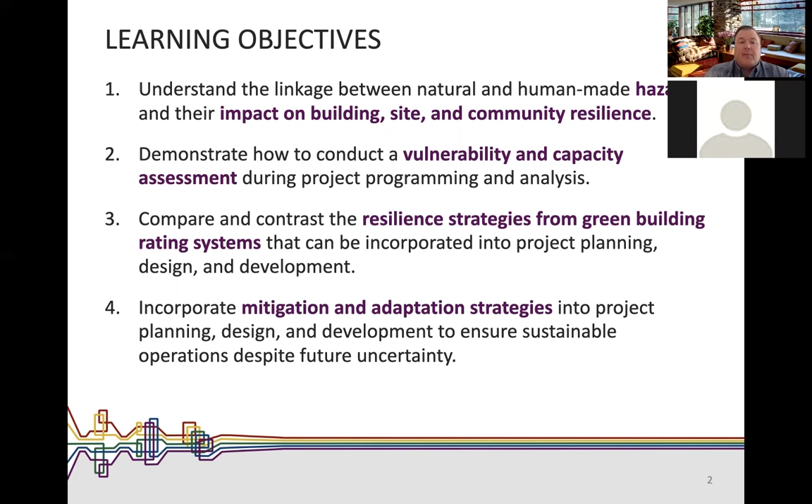Our learning objectives today are to understand the linkage between natural and man-made hazards and their impact on building, site, and community resilience, and to demonstrate how to conduct a vulnerability and capacity assessment during project planning, programming, and analysis. We'll also compare and contrast resilience strategies from green building rating systems that can be incorporated into project planning, design, and development, and how to incorporate mitigation and adaptation strategies to ensure sustainable operations despite future uncertainty.

So what is resilience? Resilience is the capacity of a system, be it an individual, a forest, a city, or a building, to deal with change and to continue on with the operations of life.

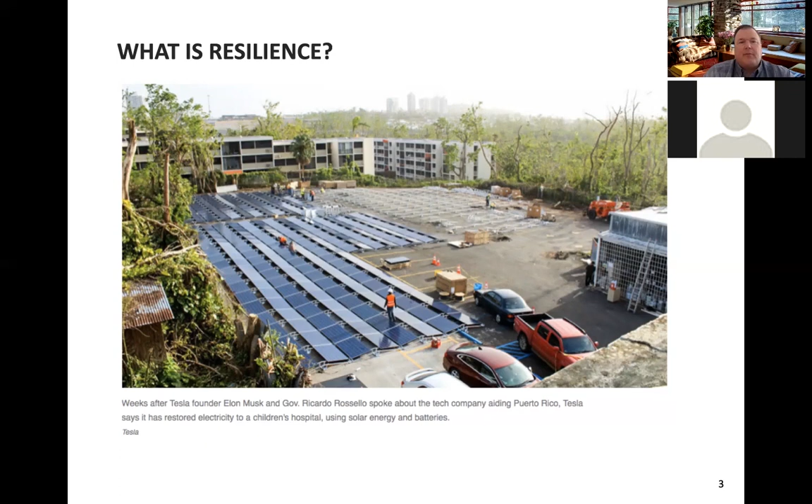As we've seen over the last few years, these disruptions can take many forms: from hurricanes in Puerto Rico that knocked out power to a hospital that was restored by Tesla installing solar panels and solar batteries months before the electrical grid was back up and running, to disruptions like buildings being burned during the civil unrest of the past few months, where business owners need to figure out how to rebuild and restore operations, and homes destroyed where people need to find new homes.

To the changes we're seeing from the global pandemic that's changing our work lives, having many of us work from home, changing the way we use offices, and many other things, to things like the fires we see in the West that have burned whole towns and destroyed people's homes.

These disruptions can take many forms, and we need to figure out how to incorporate them into the built environment, integrating them with our green building systems rather than having a whole separate set of resilience guidelines, because we need both resilience and sustainability to have the built environment we need in the future.

So a few definitions to keep in mind: resilience is this capacity to deal with change and to continue to develop.

These changes or disruptions expose vulnerabilities in our systems that we need to think through and plan for, theorizing with our project teams what kinds of disruptions might happen, so that we can design into our systems the ability to address these things.

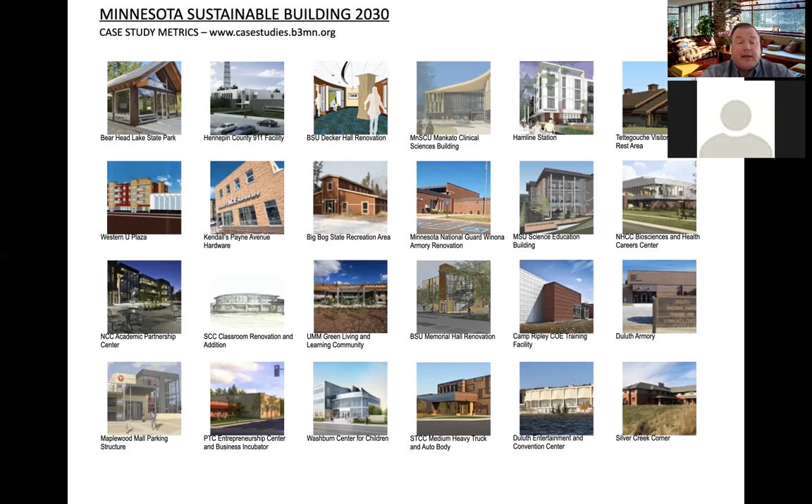So to do this, the approach we took in some of our early research, sponsored by MPCA, was the forerunner to the work we've done that we're now integrating into B3.

It's very difficult to think about: is it a hurricane? Is it a thunderstorm? Is it a tornado? There are hundreds and hundreds of potential event types that could disrupt the built environment.

The approach we took was, based upon other work we've done at the center, to think of the built environment and how it can become a regenerative system versus our existing approach to systems in the built environment. The existing approach is really focused on efficiency, thinking of the sources of materials, energy, water, etc. as sort of one-way throughputs through the building.

Instead, if we start to think of the built environment as a regenerative system, mimicking natural systems, we would think of the built environment as a circular system, where things are used and reused, and we have multiple sources of supply of the things we need - energy, water, etc.

Because we have multiple sources of supply, and we're trying to generate energy from the sun or do rainwater capture, things like that, we need to be able to store resources so that when we collect them, we can store them and then release them over time as the users of a building are using them.

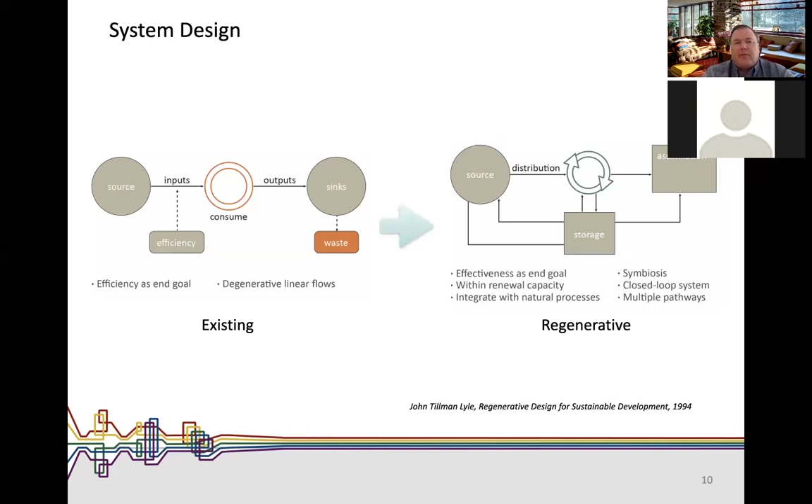We based some of this work on work that the federal government had done. The Department of Energy and Department of Defense had done a series of assessments of disruptions at military bases, disconnecting them from power, disconnecting them from water, adding different weather events that would occur. They gamed them out, made changes to the base, and tested them again.

We took a very similar approach, taking two building types. Instead of testing with different naturally occurring and man-made events, we took a high-performing building and tested it with three disruptions: disconnected it from the power grid for 10 days, disconnected it from water supply and wastewater removal, and vehicle transport as the third piece, all for 10 days. We tested those buildings, then redesigned them as regenerative systems, tested them again, and saw how they performed to come up with our research.

We also did our modeling using future weather files from the IPCC 5th assessment, so that we were thinking about how to incorporate future weather conditions into our buildings here in Minnesota as we go.

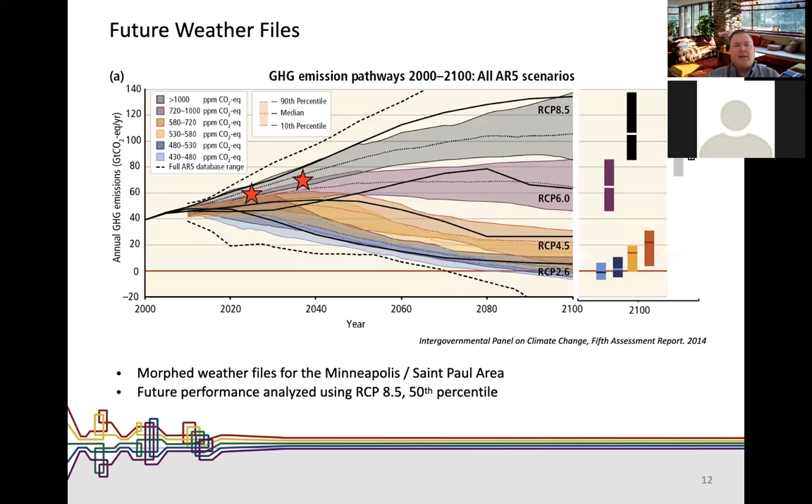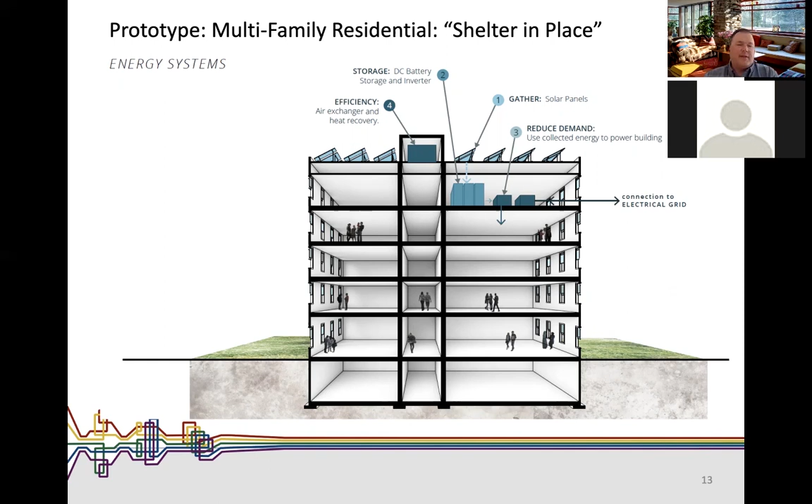We looked at two building types for this early research. A multifamily residential building came to be known as a shelter-in-place scenario for us, because it's a building that would be hit by one of these disruptions, and the occupants would try to stay in the building and shelter in place until those systems were restored.

The other building type we looked at, what we started to think of as the resilience hub, would be a building like a public library, a community school, or a community center, where it would be hit with the disruption, and there might be other buildings in the community that were damaged or destroyed. People needed to leave them, board them up and leave, and have a place to stay, a place to charge their phones, a safe place until people could get to them to support them and the systems were back up.

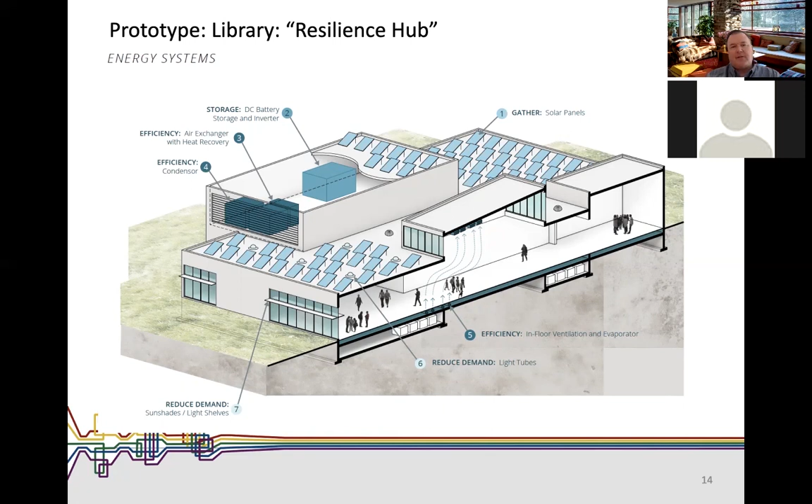This resilience hub idea started to become a good idea because these building types—community centers, schools, and libraries—if you take the Twin Cities, most of the population lives within one mile of one, if not multiple, of these buildings. If we started to set them up as resilience hubs, it would give us another source, another place we could go if something happened to disrupt our community.

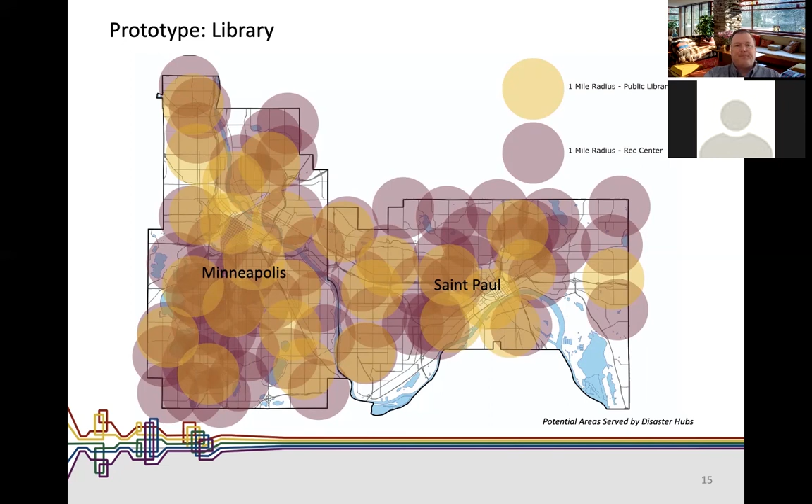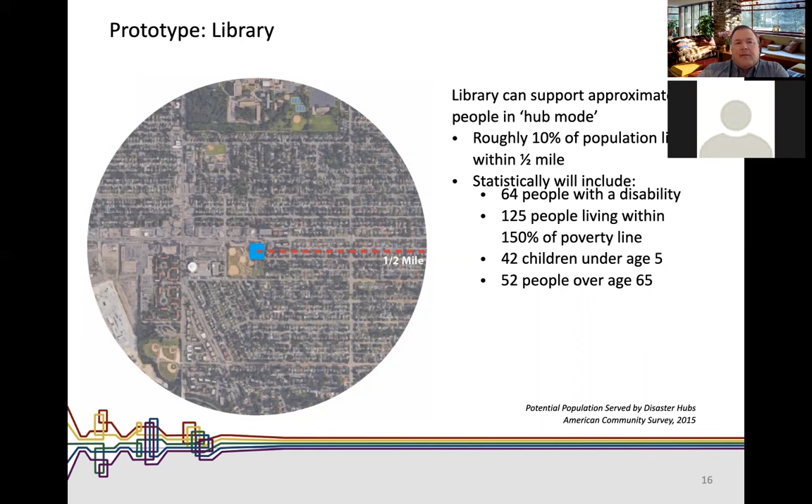The important thing to keep in mind with these resilience hubs is that where they might be designed with one occupancy for daily operations—maybe it's a library designed for 50 people—now in an event scenario, the occupancy would go up. Instead of 50 people, it might be collecting 500 people from the neighborhood who are sheltering there, sleeping there, charging phones, being fed there, until the event is through.

So we tested these two different building types, again using future weather files. And when you start to look at future weather files, a couple of things start to emerge. Strategies that we wouldn't have prioritized when looking at weather history now start to become more important as we see our weather heating up and becoming more humid.

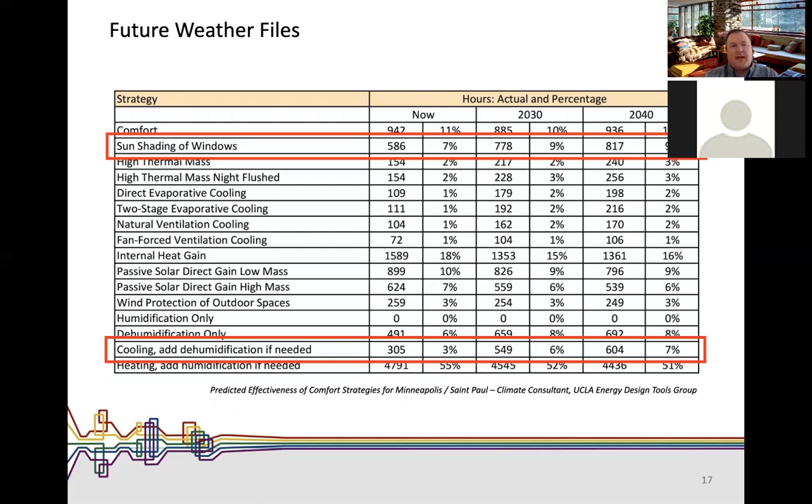Strategies like sun shading of windows, which wouldn't really have been cost-effective in the past, might start to become cost-effective in the future. Cooling and dehumidification needs increase, almost doubling in terms of the hours needed to provide comfort in the building, so that becomes a more important strategy.

In addition, we see that the energy usage, whether you look at the old code building or the new code building, the overall energy usage doesn't change much, because as heating goes down, cooling loads go up. So that isn't significantly different.

What's really interesting is the importance of, in our optimized buildings, design teams are creating high performance envelopes with high R-value walls and high performing window systems before going on to do renewable energy or other things. And what we see in buildings like this reinforces the importance of investing in really good envelopes. That very good envelope, originally created for energy efficiency reasons, also resists and isolates the internal environment from a lot of these weather changes we see in the future, especially very high temperatures and very high humidity in the future weather files here in Minnesota.

If you create these high performing envelopes, it has the side benefit of energy efficiency for sustainability, but it also gives you an envelope that can hold its temperature for long periods without the use of the mechanical system. So you can keep occupants cool during hot times and take minimal amounts of energy to maintain safe ventilation and temperatures over a 10-day disruption. And the same is true in both building types.

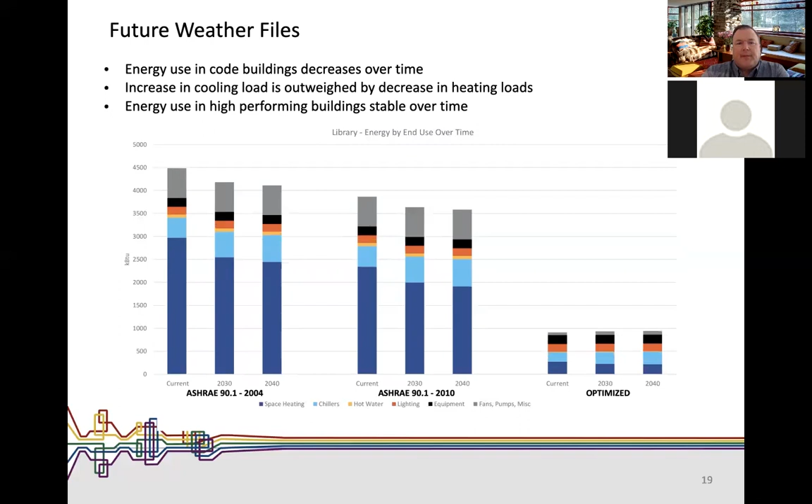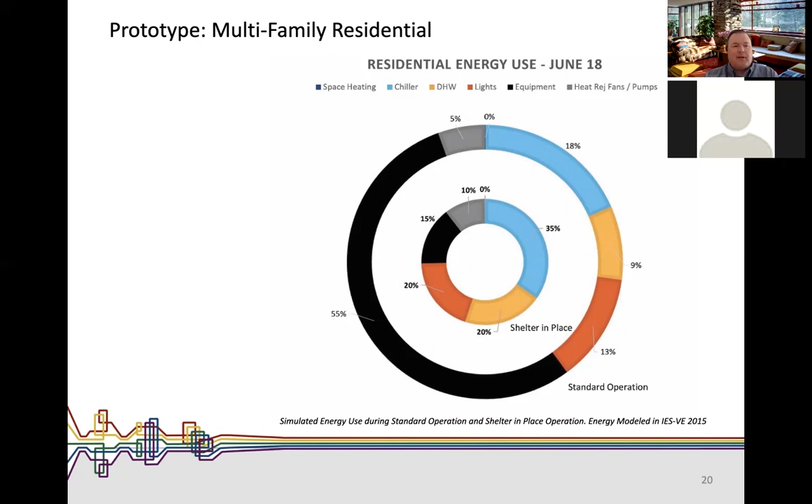So people can live over time. It's interesting because a five-story multifamily building, in typical sustainable goal setting, you'd say it's impossible for this to be a net zero building generating all the energy it needs in standard operations. But in shelter-in-place mode, there's more than enough roof area to put solar panels on the roof, couple it with batteries, and continually provide enough energy to charge the batteries.

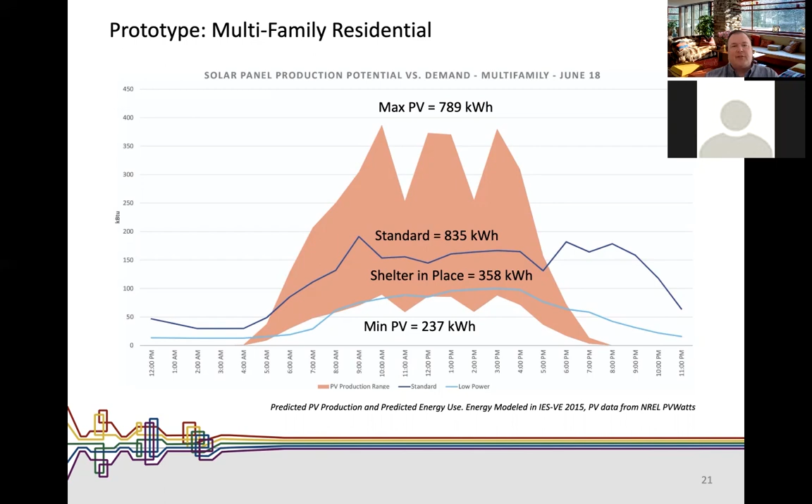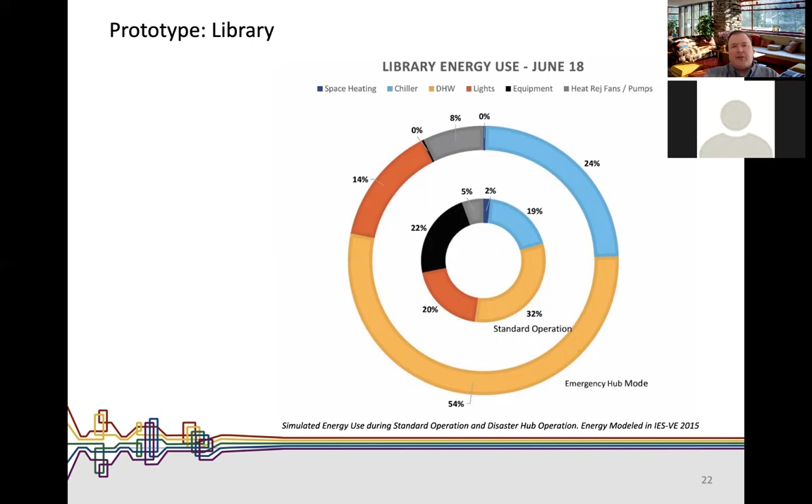So you could go on for more than a 10-day disruption of the grid in shelter-in-place mode if needed. And the library is going in the opposite direction because it's a resilience hub—low amount of energy usage in its regular operation, but increasing its occupancy by almost tenfold, so larger amounts of energy usage during the resilience hub mode.

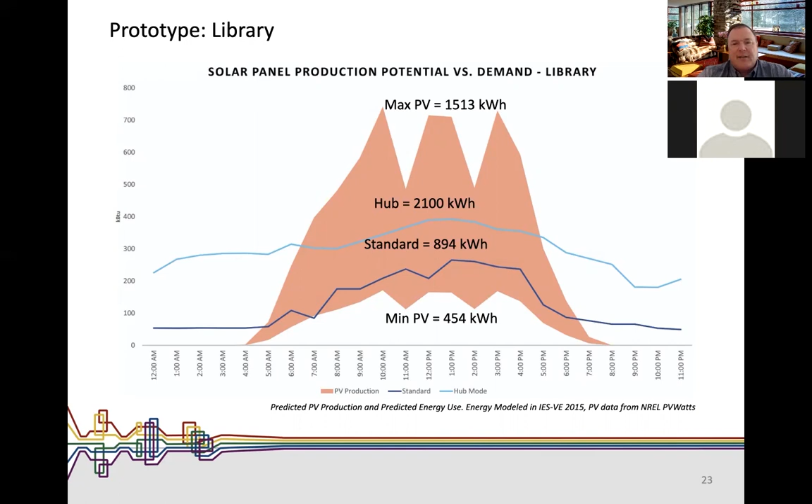Now we have a building that if designed to be net zero energy, just thinking of an entire year, we wouldn't put as much solar on the roof as when we think of the scenario that it might be a resilience hub with more energy usage. So we might put more solar panels on to take care of this larger energy usage if there was some kind of disruption. It's a good example of why you need multiple lenses to think about what your building is, what its program is, and how to design its systems in multiple ways to address these kinds of shocks.

The other thing we found in the research is the importance of shifting from regenerative goals. One of the goals in this early research was having buildings mimic living systems—goals like having multiple sources of supply of energy, a circular closed-loop water system, et cetera.

But we also need to think of how to add resilience goals to that. Resilience goals would add things like: we want an islandable energy system so we can have continuity of power with whatever might happen. We redesign the water system so we can have continuity of water and sanitation systems over time. It's important to do this multiple-lens goal setting—sustainability goals, resilience goals—and translate those into macro-level strategies, like having a higher performing envelope, that help maintain habitable temperatures.

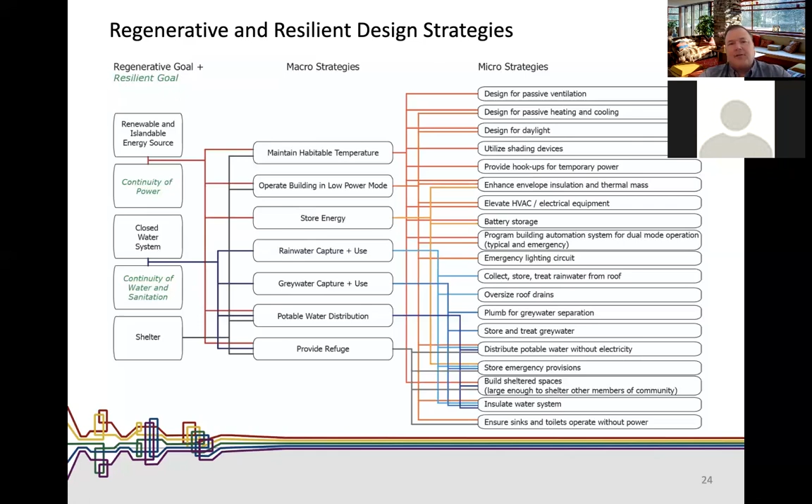And so with that, I'll hand it off to Liz, who will give you more specifics about how we're integrating this research into the B3 guidelines.

Thanks, Richard. As mentioned, I'll be covering our B3 approach to resilience, which has been in development for the past year or so, and will be introduced for projects beginning pre-design next year.

The biggest change will be a new guideline in the performance management section. The intent of the new guideline is to bring awareness and intention to the functionality and role of the project in the event of a disruption of energy, water, communication, or other services.

The guideline will require an assessment using our newly developed tool, the B3 Resilience tool, and implementation of at least one design strategy as a response to that assessment.

The B3 Resilience tool is an Excel-based worksheet. It includes some preloaded data from the Minnesota State Hazard Mitigation Plan, which was updated and released in 2019. This plan is developed by the Department of Public Safety's Homeland Security and Emergency Management Division and is approved by FEMA.

It includes a county-level survey of the history and possible future of natural hazards across the state. Because the Minnesota Hazard Mitigation Plan is the backbone of the worksheet, the assessment begins with a county-level natural hazard assessment, proceeds to an assessment of human-made hazards, and then an assessment of the capacity and goals of the project, and finally a process of identifying resilient design strategies that respond to the hazards and goals identified.

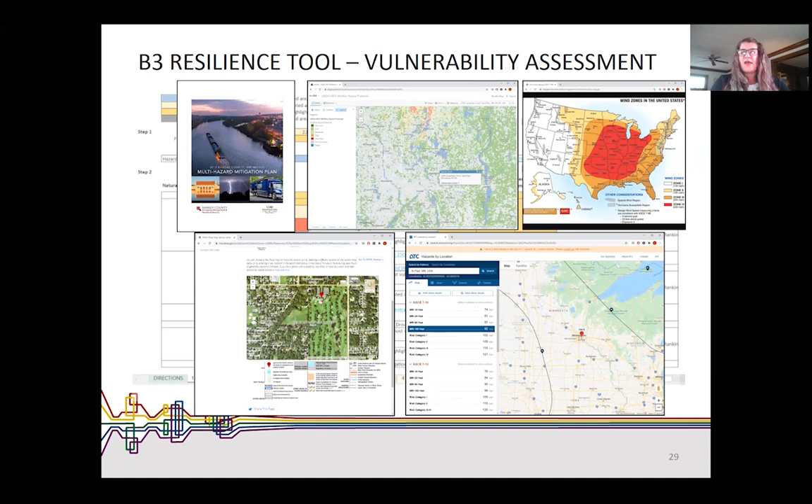After compiling the information about the listed natural hazards, project teams are asked to discuss and determine the risk level to their specific project site and program, and which building systems may be impacted by a significant natural hazard event. Impacted services in the tool include electricity, natural gas, potable water, wastewater or sewage, transportation to or from the project, the physical structure, the safety of occupants, communication, and food access to and from the project.

In this example project, there's a medium wind risk for the site, and because this area is served by overhead power lines, electricity is a vulnerable system due to wind risk. Because this is a fairly dense site, there's also a danger of hazards flying through the air associated with wind or tornado risk. So this process is the distillation of the county level data down to the project site level and even the system level.

So this is meant to be a discussion and based process of translating high level data down to building level impacts.

Continuing on that same vein, we're looking here at the human-made hazards included in the tool. It's also vitally important to consider these, but there is a lack of data or underpinning to base probability on.

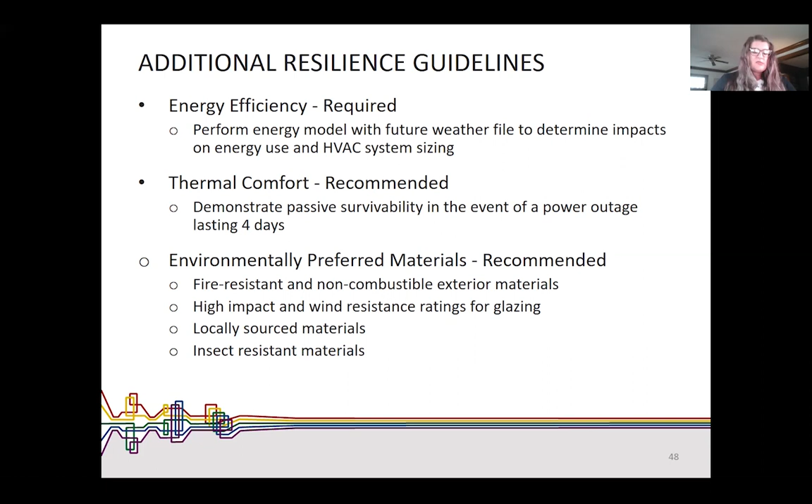The recommended guidelines include demonstrating passive survivability with no electricity, which entails maintaining safe interior temperatures for a period of 4 days during representative peak time, related to the super insulated envelope requirements mentioned earlier. There may also be material considerations for durability to hazards, including fire or wind impacts, using materials that can be repaired or replaced with local labor and stock, and considering expanded insect ranges, especially termites.

Because sustainable design and resilient design are closely linked, several guidelines already in the B3 program contribute to the overall resilience of buildings and sites. In the site and water guidelines, there are requirements around floodplain restrictions, stormwater management, soil stabilization, and resilient vegetation that all contribute to resilience. Renewable energy, efficiency, and efficient plug loads contribute to lower energy requirements for buildings at all times, and in critical load situations lower the required generation and storage needed for resilient power systems.

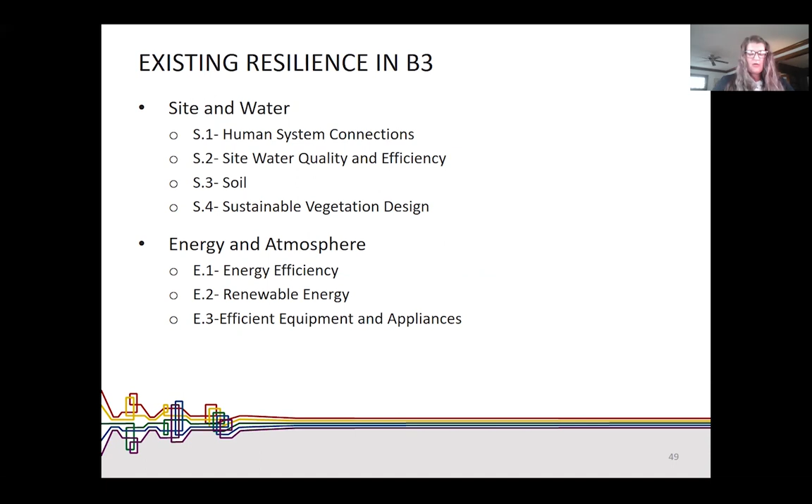Additionally, guidelines to ensure moisture-safe construction and thermal comfort enhance the durability of the envelope and further contribute to passive survivability. Use of low power lighting and daylighting further reduces critical loads during emergency operation. Comprehensive wayfinding can ensure people can move easily through the project and that anyone sheltering in the building can navigate and access it, contributing to community resilience and supporting sheltering and resilience hub goals.

Finally, the materials and waste guidelines require use of durable materials, consideration of design for deconstruction in the event of a building damaged beyond use but with salvageable materials, and a reduction of hazardous materials in the project which may affect humans during extended occupancy or which may become hazardous when burned.

This is a very quick overview of our peer programs' approach to resilience and how our B3 process can fit within those programs to contribute to these optional points. We've already referenced the LEED pilot credits, one for assessment and planning for resilience and one for design for enhanced resilience, both of which would contribute to the optional innovation credit in the LEED system.

Enterprise Green Communities awards optional points for a vulnerability assessment, for strengthening cultural resilience, for providing potable water during emergencies, and for resilient energy systems in the form of floodproofing and providing electricity for those critical loads.

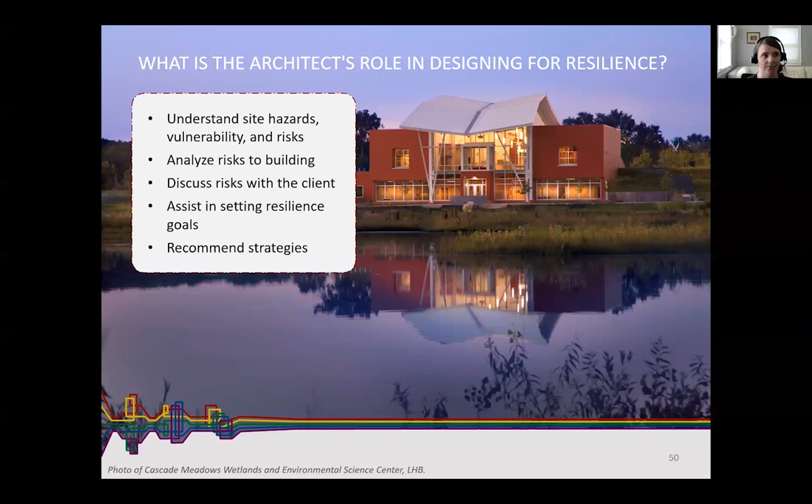So what should you keep in mind when conducting a vulnerability assessment? First, ideally, this would be done prior to site selection and programming to help inform these activities. Avoiding floodplains is one obvious example of this, as shown here, and is something that is required by B3 elsewhere in the guidelines.

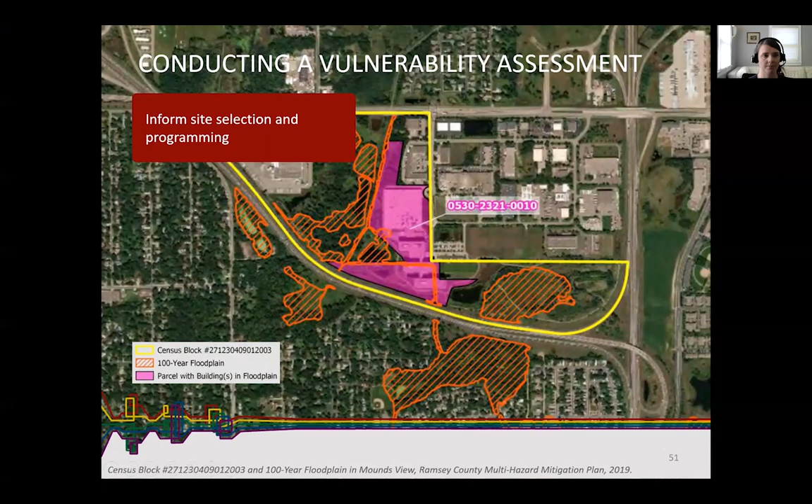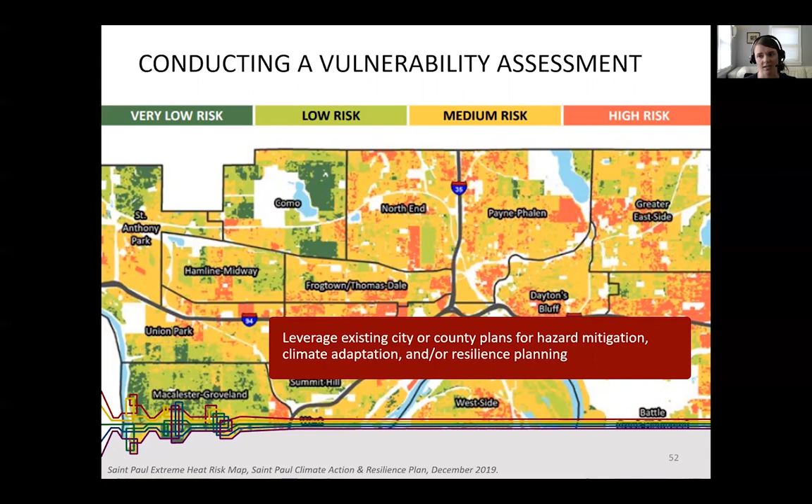You may be able to find documentation that's already been created that compiles information for your project site, whether it's a hazard mitigation, climate adaptation, or resilience plan. As Liz demonstrated, the B3 tool links to county-level hazard mitigation plans. For a little bit finer resolution of detail, this extreme heat risk map is from St. Paul's Climate Action and Resilience Plan, which also includes other risks and resilience strategies. But also remember that site-specific conditions may alter the risks identified in larger scale community plans.

Be sure to note the age and the source of the data that you're referencing. In some cases, the relationship between older data and what's happening today is relatively obvious. For example, in cities or neighborhoods that don't have a lot of turnover, large percentages of children under 5 years old will turn into large percentages of children 5 to 10 years old 5 years later. But in other instances, trends over time are a little bit less predictable.

This example is showing days with maximum temperatures above 95 degrees, both historically and projected into the future. We know that extreme heat and precipitation events have increased and are anticipated to continue increasing, so many areas that may not currently require air conditioning or flood protection are more likely to need these strategies during the lifetime of the building.

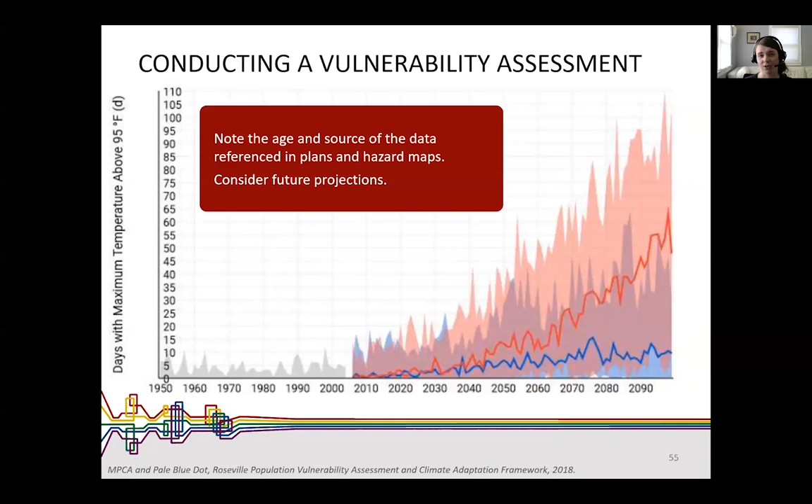Just a note on this graph here: the red scenario assumes a business-as-usual increase in greenhouse gas emissions, while the blue scenario assumes that global emissions stabilize. In the description of the graph, it notes that people who have a low tolerance for risk often focus on the red scenario. So that's something you're thinking about when you're setting your resilience goals for the project - what is the risk tolerance of the owner and of the building users?

Once you have a handle on the different hazards, like extreme heat, you'll need to evaluate the relative risks of these hazards leading to harm. As Liz showed with the B3 tool, the county level plan identifies hazards and the likelihood of each hazard occurring. Then the project team would evaluate the potential impacts of the hazard to the building and to its users before determining the relative risk. One simplified way of doing this is to weigh the likelihood of the hazard versus the impact of that hazard occurring on the building occupants and the building itself.

So bringing back in Richard's example of the recent civil unrest, this is something that may have had a low impact on some buildings - graffiti, or maybe a change in operating hours - a bigger impact on those that had broken windows or looting, and then a larger still impact on those that ended up burned to the ground.

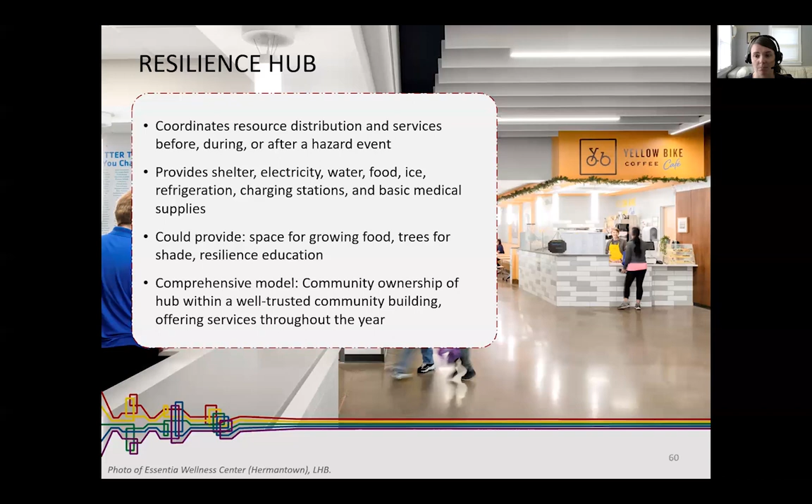The Urban Sustainability Directors Network describes the ideal resilience hub as an enhanced community center with established community ownership and trust. These centers would contribute to building social resilience year-round by offering additional services such as translation, flu shots, diabetes screening, job training, or after-school programs. But that type of thing may not be appropriate for every single project you're working on.

We wanted to discuss the synergies and conflicts between resilience and sustainability. Liz already walked through how measures throughout the B3 guidelines contribute to both sustainability and resilience, whether through site selection, connections to trails and transit, stormwater management, biodiverse plantings, water and energy efficiency, passive thermal and lighting strategies, and renewable energy—which requires the additional ability to operate independently from the grid to move from a sustainability strategy to a resilience strategy.

I also wanted to point out the importance of wayfinding and universal access, both for protecting occupants during extreme conditions that may impact visibility or mental cognition, but also for projects intending to open up to the broader community as a resilience hub, where users may be much more diverse than those who use the building on a daily basis.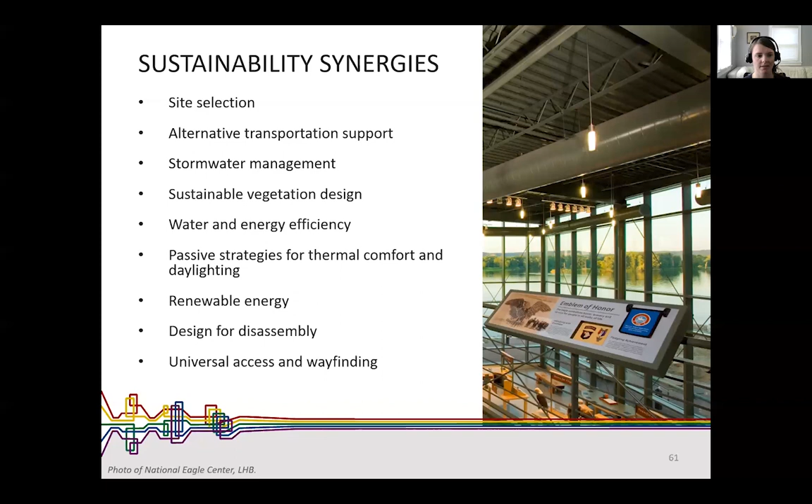There are, of course, also some potential conflicts between sustainability and resilience, mostly focused on the theme of using additional resources to oversize spaces or systems to handle extreme scenarios. In Richard's example of oversizing the library's PV system to accommodate resilience hub loads, this is relatively easily addressed by sending the excess clean power back to the grid.

In other cases, you might decide it doesn't make sense to design a cooling system to handle a rare 110-degree day, and that other strategies like personal thermal comfort systems may make more sense to tackle these extreme conditions. In other cases, you may just be trying to choose a more sustainable resilient solution, such as ensuring an oversized structure uses low carbon materials, or offsetting the extra electricity from air conditioning with on-site solar.

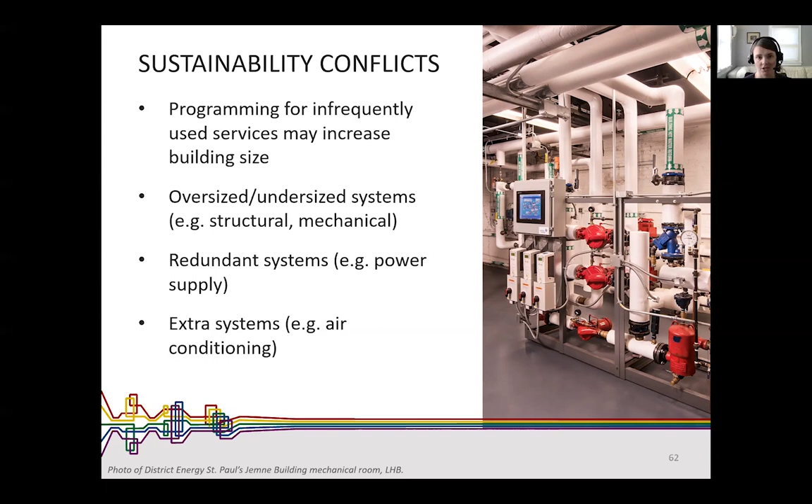We wanted to leave you with a few key takeaways before opening it up for questions. First, embrace resilience as a value add to your client. Some are already requiring resilience to be considered, and many others are newly realizing its value. So celebrate this as another service we can provide, and engage staff who are especially interested in this topic to become experts at it.

Next, if no one else is, raise the topic—whether you're an emerging professional asking your project manager, or a project architect bringing it up in a client meeting. With sustainability, we're surprised by how often, when we ask why sustainability wasn't mentioned in an RFP or in the project goals, we hear, oh well, we just assumed you'd be designing us a sustainable building. Just like sustainability, most resilience goals and strategies need to be understood by the whole team to be successful. So whether you get an answer like that and say, great, let's move forward discussing it, or it's something where you're providing additional education to the client.

Third, can't stress enough: consider the future. This is what resilience is all about, whether using future weather files to inform design strategies or looking at how the building's program may shift in years to come. We've also continued to emphasize that envelope performance, one of the pieces architects have quite a bit of control over, is critical for passive survivability. So don't sell yourself short on that.